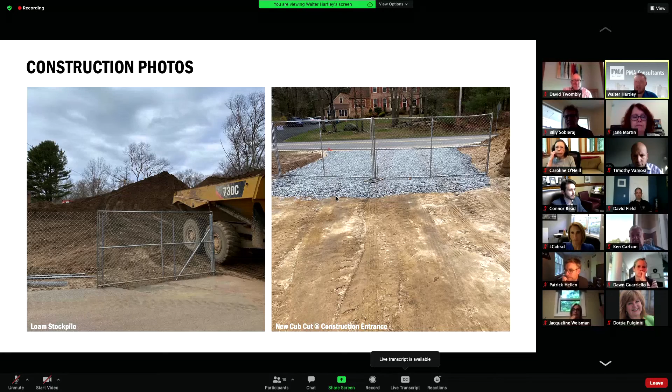On the right-hand side, you'll see the new curb cut at Lothrop Street. We call it the 37 Lothrop Street entrance. It is the emergency and first responders access only. There'll be a gate those first responders will be able to get through, but that is the construction entrance. You see the wheel wash, which has since been extended to make sure there's no silty materials getting onto the road. It does occur sometimes during a big rainstorm, so they backed it up about another 40 to 50 feet into the site to really make sure they were able to catch it all. So that's one of the new curb cuts.

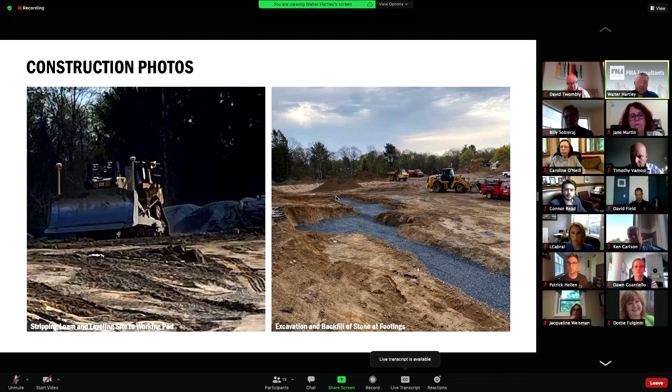On the left, you'll see the dozer doing a little bit of loam stripping and bringing that elevation down to the working pad where the rammed aggregate piers were then put in. You'll see those in a few pictures. On the right, you'll see excavation and backfill of stone at the footings. The excavation goes down with a witness from the geotechnical engineering company, Geotechnical Partnership. The stone is immediately placed to secure it, it's proof rolled, and then more stone is placed and proof rolled on top of that. All of these excavations are witnessed by the geotechnical engineering firm.

On the left, you'll see the material that was taken out below the loam, which is on-site material being crushed and reused. It's being crushed because, as you can see in the bottom or middle left of the picture, there are large stones, not boulders, that need to be broken up so good compaction can be achieved.

On the right-hand side, you'll see the operation of the rammed aggregate pier installation. During design, due to the nature of the soils on the site, it was recommended and decided to move forward with installing these piers. We did about 1,100 of these over the last two and a half months. Subsurface Constructors, who came out from the Midwest, I believe Missouri, recently broke down their equipment.

They drove out here with all that equipment, set it up, did their rammed aggregate piers, and broke down their equipment last week, and they are off site now. So one entire phase of the construction portion is complete at this point in time.

What you see on the right is the auger, which digs down anywhere between 10 and 15 feet. Sometimes they hit a little bit of refusal. They try to work through it. If they can't, it's designated as a non-useful pier, but they track it anyway. There weren't a lot of them, and they were able to get through them.

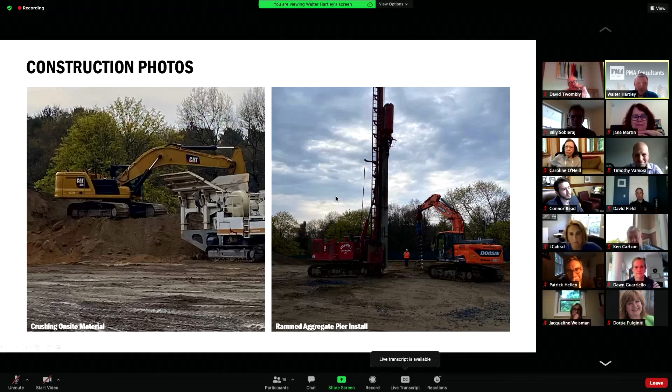On the left, you'll see the footings going in. L&L Concrete is on site. They started forming up footings, and you can see the layout below the spray paint.

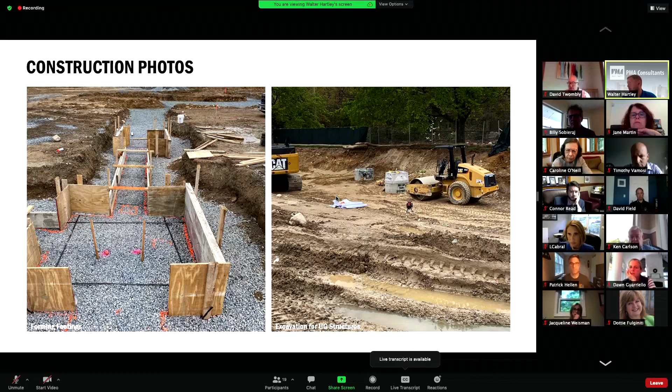On the right-hand side, you'll see excavation and installation for underground structures. This is looking at Lothrop Street, and to the right is the police and fire station.

Here on the left, you will see UGI number 1, the Underground Infiltration System number 1. We have three of these on the site. There are six chambers along this one. There's stone, fabric, and it's taken down to acceptable soil, then the fabric is put on the stone.

The blue tubing that you see is the corrugated system. They latch together and are built from one end. This system goes from almost one entrance to the other along Lothrop Street, so it's quite large. It's the largest system on the site.

The two other systems are under the parking on the easterly side of the site, and then in between buildings C and D, which are the easterly parts. So there's two more on the east side of the site.

We've started pouring concrete, and you can see that here. These are the concrete footings and rebar in prep for the walls along E building, first site.

Over on the right, you'll see the equipment tracking back and forth, sitting right on top of the underground infiltration system. So that whole system has been covered up, installed, and is good to go.

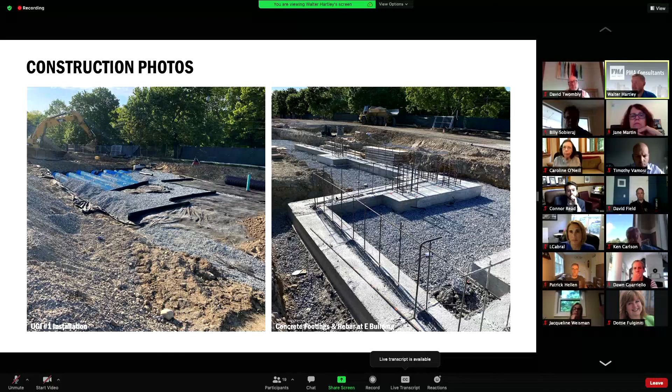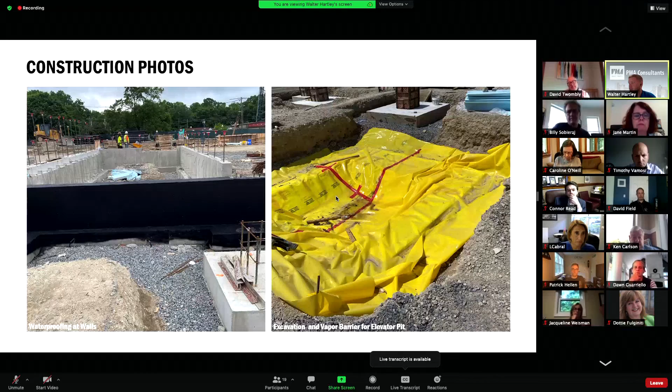On the left here, you'll see the beginning of the waterproofing and damp proofing at the walls at E building. And on the right, you'll see the excavation and vapor barrier for the elevator pit.

We do have three site cameras. This one is on the northwest corner of the site. We have one on the northeast corner, and another on the southeast corner. They're viewable to anyone who would like to see them, but this is just a really good picture. The construction trailers are to the left-hand side, and you can see quite a bit of progress.

There's a lot of material on site. Footings are moving around, and interior footings and piers are going in. A lot of the water utility material is over in the corner along the tree line. So the site's quite busy.

There's typically anywhere from 20 to 40 people on site, and that is going to ramp up quite a bit. As much as 20 to 40 people is good, we are going to eventually get upwards of 100 at some points on this site, so we'll get extremely busy.

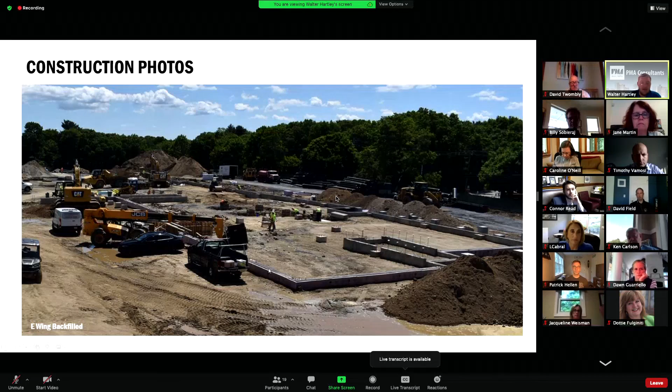Quick update on cash flow. Before I turn it over to Chad, I'll open it up for any questions.

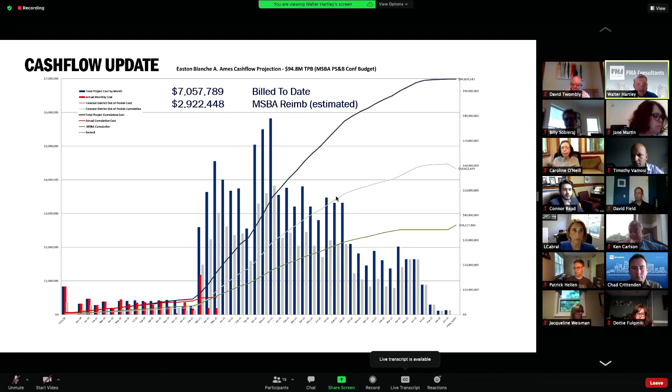Thanks, all right, so that was a quick construction update. I'm going to turn it over to Chad at this point, and Chad's got some great information to update the committee with.

All right, thanks, Walter. So the reason that this committee hasn't met in the past 3 months - we were tied up in bid protests with the Attorney General's bid protest unit initially.

And while they were working on their decision, a case was actually filed in Superior Court seeking an injunction on the project. This all goes back to the award of the general contract, something we had talked about as a committee and knew was coming. We certainly knew they were going to go to the AGO bid protest. We were uncertain whether they would seek an injunction. They did. The good news is on both fronts, they were denied.

So while they were waiting for their date in court, the AGO, because they already had the hearing, issued a decision denying the protest at the AGO's level, which was terrific, because if they had filed the injunction in court first, we would not have gotten a position from the AGO. The AGO will not chime in on something that's in the court's hands. And then, a few weeks after the AGO's decision, the Superior Court also denied the preliminary injunction. So we are in the clear on this end and charging forward.

And Chad, I believe we are past the appeal period? Yes, sorry, I was blanking there. The decision was dated May 3rd. The odd part is it didn't get posted and nobody was aware of it until a couple weeks after that. So I don't know exactly where the appeal period lands, but if you use the May 3rd date, the 30 days is up, though I don't know which one would actually be applicable.

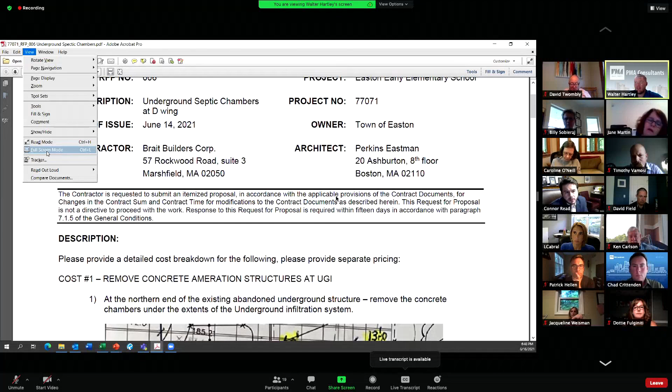Certainly, Connor? And it would not be PMA's anticipation to use that. This just seemed like one of those, but yeah, I totally understand.

Just to make sure I understand the question, Walter: this is an item that came up, we only got pricing basically yesterday. You're asking if the school planning committee can have a standing item for its regular meetings, items not reasonably anticipated, to deal with things like this. Is that right? Yeah, basically a safety outlet.

My only question, I guess, is doesn't the technical review committee make that unnecessary once that's established? It should, yeah, it certainly should. This would be a non-discretionary item. You are correct, so it almost should become unnecessary.

So in a case like this, you would send the information to us electronically. You wouldn't even wait probably for the weekly if it was that time sensitive, right? You'd say you all have to look at this and give us your okay or not. Right, we're just kind of in that unprecedented time where we were unfortunately waiting for those protests to wrap up.

So we are just a little behind the 8 ball because of those 2 items, because of those protests.

I understand. I think Jane's instinct is a good one, though - generally items not reasonably anticipated is kind of a catch-all that can get folks in open meeting law trouble. I obviously trust everyone on this committee, so as long as it's not just getting used as a catch-all, I think it's okay, but it also seems somewhat unnecessary if we're establishing a formal kind of rapid review.

You're correct, you're correct. I should have. Yep, absolutely, you're correct, Connor.

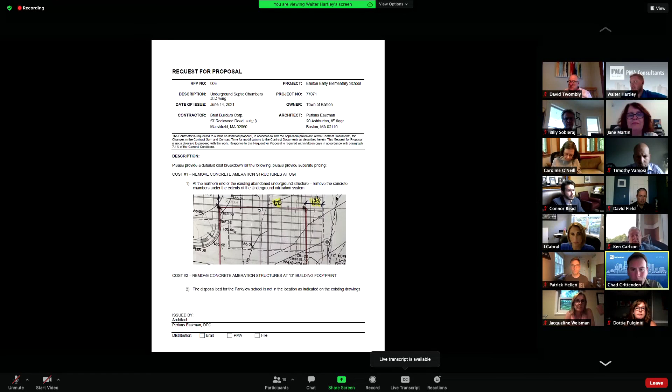All right, so actually jump to the next page, Walter. There you go. And you can zoom in on the top half up there.

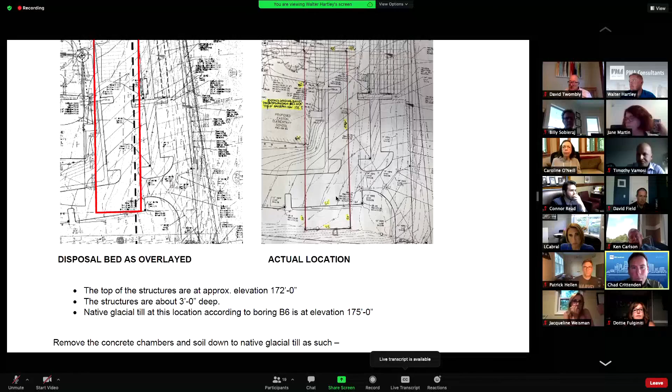There's an old abandoned leaching field that's about 15 feet underground. You can see on the left side, it was shown on the as-built to not be within the building footprint. But when you look on the right side, that's where it actually exists out there. Walter, if you can move your cursor over the corner of the building that it's actually underneath - this is the building corner that it's shown not underneath, and this is the actual location as found. So that's the corner of the building right there.

So what needs to happen? We need to dig down 15 feet in that area and remove those concrete chambers and then backfill it with structural soil. Then we can continue with footings and foundations, but right now they're on a standstill in that area. We've actually scrambled to resequence the structural steel in the entire building based on this. So it's something we need to act on quickly as it has potential to incur more cost, and it needs to happen - I don't know that we have another choice.

So we looked at other options. Filling those chambers with flow fill - that top corner goes into the building almost 20 feet, and these chambers are super shallow, only about 3 feet high. So there's no way to guarantee that you have flow fill in all those chambers, and none of the engineers would sign off on that. We also looked at the option of actually leaving the chambers in place - again, engineers won't sign off on that. This is delegated design, so the company that installed the rammed aggregate piers actually has their own engineering firm, so we have to make sure they're on board as they stamp this entire design. And then of course Perkins' team needs to also be on board.

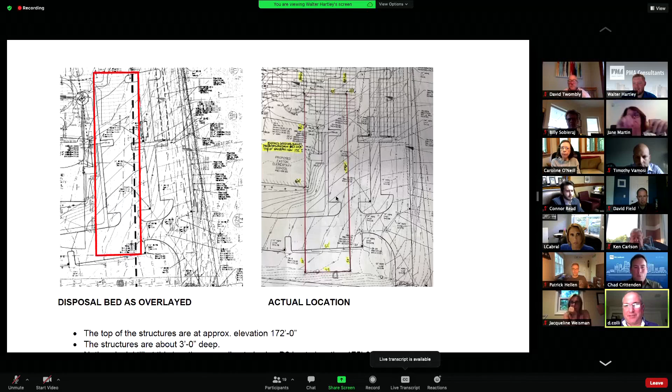The fourth option, Dan, what was the fourth bullet we looked at? Punching helical piles through it. Yeah, that's way more expensive, we don't want to do that. It's another option, but that's probably going to take more time. We'd have to punch those 20 feet down, get a specialty drill rig here to go all the way down to bedrock with them - for weeks. So it's not a real option.

So we understand the problem, we understand the options for solution. You don't have a cost yet - this was not something that was anticipated when we were putting the project budget and the design together. So now what you need is the authorization to go ahead and take this money from construction contingency - whatever the amount is to take it from there. And it needs to get done. It needs to happen. This would be something that would normally be happened now.

If the technical review committee were in place, they could approve that. Okay, right, so I'm not quite sure - go ahead, Connor, do you have like a magnitude of cost idea?

Chad, do you have a rough order of magnitude on this option? We ran through so many scenarios the other day, I can't remember exactly. We didn't update it with the color-coded sketch showing how far we're chasing it outside, including the safety slopes. It's probably a 6-figure change, around $150,000 all said and done, but it's tough to say until we dig down and see how far we have to chase it.

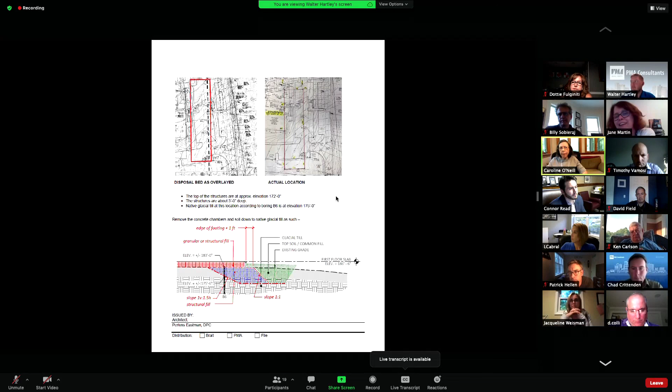I'll go ahead and ask for a motion from the school planning committee to authorize PMA to move forward with the work needed as a result of the change in location of the underground leaching field. So moved, seconded by Hellen. Roll call: Cabral, yes. Carlson, yes. Fulginiti, yes. Hellen, yes. O'Neill, yes. Read, yes. Sobieraj, yes. Vamosi, yes. Weisman, yes. Martin, yes.

One more question before we move on: was that all coming out of just the construction contingency, or was design coming out of the design contingency separately? Was it multiple buckets or just one? There's no design cost for that leaching field work, it all comes from construction contingency. If you're asking about the septic, that's anticipated to come from one of the design buckets. I believe there's 260,000 within the 450,000 design allowance line item, plus another 2.16 million in soft cost contingency, so it could come from either. The wastewater treatment plant is coming out of design contingency, while the underground leaching field is coming out of construction contingency.